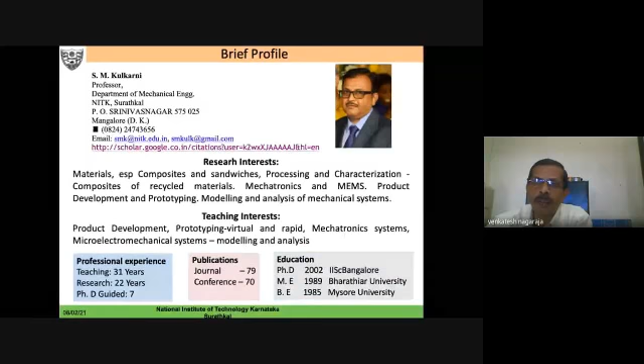We will start. Dear participants, it's my privilege to welcome Dr. S.M. Kulkarni for this session of the FDP. Till now we could listen to Mr. Vinayak Kamath from the industry perspective, on the various benefits of additive manufacturing, where they are used, and the various case studies he explained wonderfully. Now we will be having the session on additive manufacturing technologies by Dr. S.M. Kulkarni, covering various technologies like SLA, DLP, CDLP, SLS. We have been listening to them, and we will know more about those technologies, how they are used, where they are used, and all those things.

Let me introduce Dr. Kulkarni to you all. He is working as a professor at the Department of Mechanical Engineering, NITK Surathkal, and his research interests are in the field of material science, especially composites and sandwiches, processing and characterization, composites of recycled materials, mechatronics, MEMS, and he has extended from composite materials towards product development, prototyping, and modeling and analysis of mechanical systems.

Along with research interests, he has also demonstrated his teaching interest in the field of product development, prototyping, virtual and rapid mechatronic systems, MEMS, modeling as well as analysis. He has a profound experience of 31 years of teaching, out of which 22 years are in dedicated research work. His publications number 73, across 79 different journals and 70 conferences, and he has an H-index of 11 on Google Scholar and 10 on Scopus.

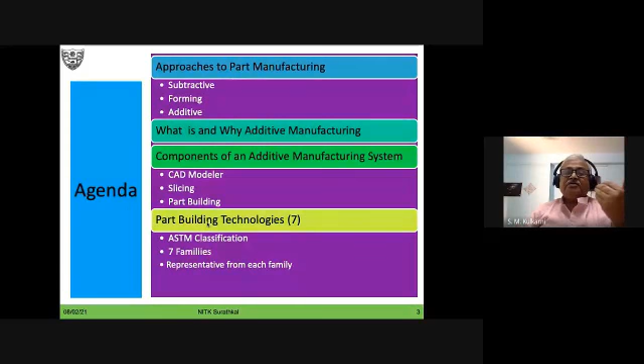Then we will start with the ASTM classification. ASTM has divided all these part building technologies into 7 families, and I will take one representative from each family of part building technique and discuss how it works. Finally, we will conclude with a summary of this talk, and whatever clarifications you need, we will look at those later.

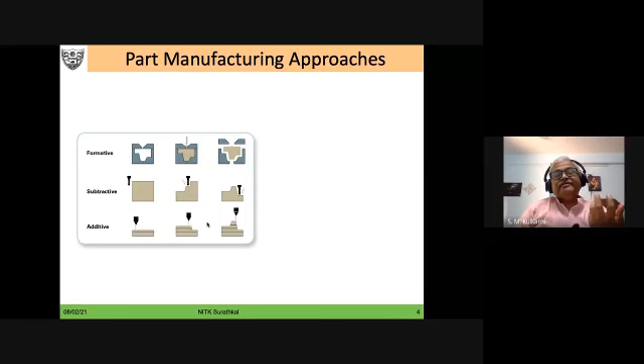There are 3 different part manufacturing approaches. The earliest is formative: make a mold, create a cavity, put a molten material into the cavity and allow it to cool. The molten material, after cooling, takes the shape of the cavity you have created. This is the good old casting technique. The same applies to injection molding, where we inject fluid plastic into a cavity, and when the cavity opens, you have the part cooled in that shape. This is the formative technique, with examples like injection molding, die casting, pressing, and stamping.

The second approach is you start with a bigger block of material and cut the material out wherever you want, depending on what kind of shape you want to create. Based on that, you remove the material. You are taught in basic mechanical engineering a large number of material removal processes like turning, milling, and drilling. All these are examples of material removal, the subtractive approach to part building.

The third approach, which has lately become more popular, is the additive approach. The first principle of additive approach is that the part is created layer by layer. One layer is made and on that another layer is put; those two layers fuse together and gradually the part is built. This is the principle of additive manufacture: layer by layer assembly is the crux of additive manufacturing.

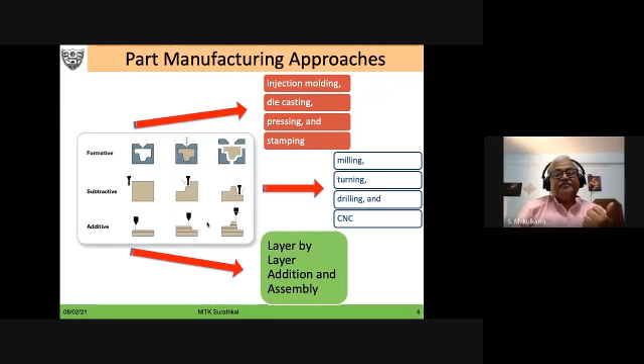So this is the comparison between subtractive manufacturing and additive manufacturing. Dr. Kamath also mentioned that there is a lot of waste in subtractive manufacturing. Though some part of it can be recycled, even the recycling costs a lot.

Say for example, when I start with a basic material like this, using the subtractive approach - drilling, milling or turning - I remove material to get the part I require, generating a lot of waste. But the other way around, additive manufacturing, I use this material and compact it to create the part. So the waste is less when I go for the additive approach.

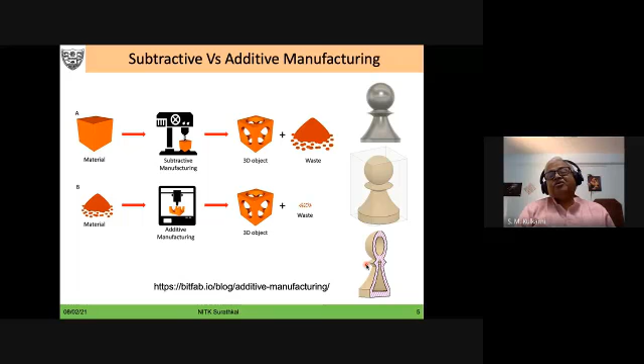The same is depicted here. What I am interested in making is a pawn. The subtractive approach indicates that I should cut the material and shape it like this. But the additive approach makes me think that I can create it layer by layer and achieve the objective of fabricating this part. So this approach reduces cost.

Here are some advantages and disadvantages, and as discussed in the question answer session, it is the economics that is governing. When the number of parts is less, definitely such additive manufacturing will rule the selection.

Forming and subtractive manufacture, to some extent, are economical when producing large numbers. Say injection molding is economical when I make a mold and use it for say 1,000 parts. The cost of the mold gets distributed over 1,000 or 10,000 parts. That is why the cost of the part drastically comes down when using these processes. So ultimately, it is the economics which governs the selection of these processes.

So when the part is big, presently the build rates are less, cost is more, and only when you have different complex designs can you go for additive manufacturing. It is nicely said in point number 2, complexity you get for free - that means any complex shape you can manufacture which otherwise is difficult to manufacture by CNC or injection molding or other types of processes. So this is a quick comparison of these approaches.

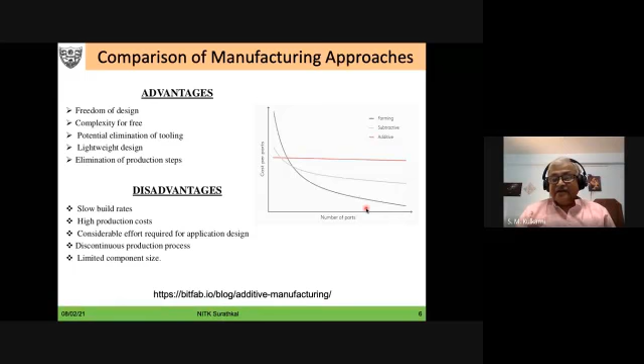So with these advantages, we would like to look into additive manufacturing - what it is and all.

If we go back to history, it all started with photo sculpture. There are 2 epochs accredited to photo sculpture. One is Francois Willeme, who was asked by his king to create a life-size doll of the king within a very short period. The story goes that he hired about 6 sculptors and started with a cylindrical piece, divided into 6 areas, drew the picture of the king on these 6 portions, and asked them to work independently, which finally consolidated into the sculpture. This is called photo sculpture.

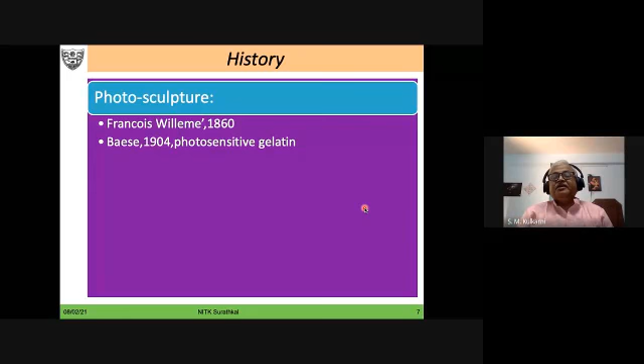Photosensitive gelatin was found in 1904. Gelatin is a material which swells with exposure to moisture. What we did is start with gelatin, cover the required parts with some material, and then expose it to moisture. The gelatin got swollen in those parts, creating the shape of a human being. That was Baese in 1904.

Some more epochs got added, like photo sculpture and topography. Topography is creating a survey map, a 3D survey map of Earth - showing where there is a mountain, where there is a valley. This was all made by cutting curved sheets and stacking them, done by Morioka in 1934. You see some of these models, like power project models or building models, tabletop models - they were created by stacking, cutting, and attaching those sheets to create a structure.

So this was the earliest idea to make a solid object out of small layers. In 1951, the earliest way of curing a photosensitive resin came into existence, and later on we have commercial versions of this stereolithography apparatus, which is one of the earliest part building technologies in rapid prototyping, or as we now call it, additive manufacturing.

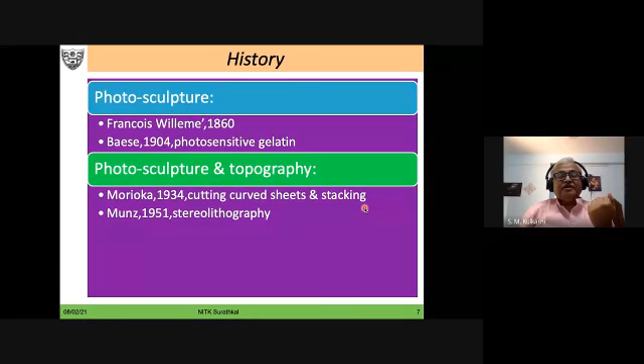There are some other triggering events in the history of additive manufacturing. In 1968, photosensitive polymer was discovered by Swainson, added to UV curing resin, which takes the shape. Then Ciraud gave the idea of compacting a powder with some energy used for fusing these powder particles. So these are some of the noted events in the history of additive manufacturing.

But presently, earlier this additive manufacturing was called by the name rapid prototyping. So now coming to the perspective of why do we require this additive manufacturing for prototyping - quickly, I'll request you to observe the product development process.

Once we imagine a product, first we put down a concept, then we identify the different systems, design the parts, and make those parts assemble as a product, testing the prototype before the design is frozen.

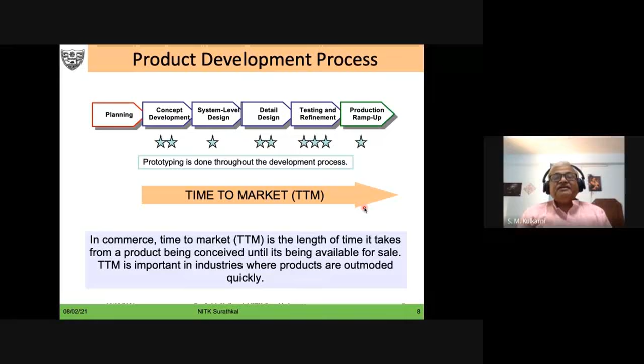But now the TTM for a new car in General Motors, in one of the literature I could read, is hardly 18 months. So today they can conceive a new kind of vehicle within 18 months, all due to different advancements in this product development process. I can represent these advancements pictorially in a graph like this.

The first thing that cut down the time was design modeling, visualization of design. Now there is no alternative to CAD. Everyone knows what CAD is. With the inclusion of computer-aided design, 3D modeling, 3D visualization, and FE analysis, we could cut down the design and analysis time for a new product.

We also added structural analysis - whether the part is strong enough, whether it fails, what forces it can sustain, and what is the optimum shape for these forces coming on the part. All this can be done using finite element analysis, cutting down the analysis part.

Earlier we used to make prototypes and load them - this was called destructive testing. That is now deferred for a later time. So engineering analysis and design optimization was cut down to a minimum by finite element modeling, and you can do lots of iterations within no time.

The third thing that came into product development was rapid physical prototyping, along with virtual prototyping. You also have virtual reality now - you can put your product on a virtual reality platform. People will wear those glasses, go around, and physically feel the product, and then you can freeze the design based on their inputs.

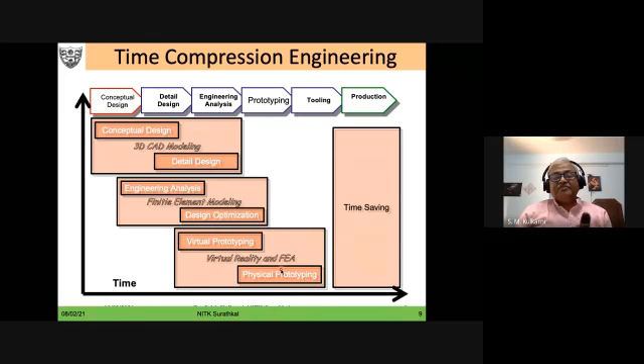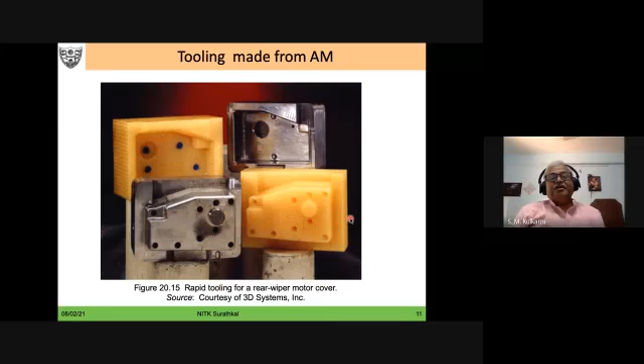Another advantage of rapid manufacturing or additive manufacturing is rapid tooling. You want to create a large number of injection molded components, but for that you require a mold, and to create that mold you require a pattern. Who will give you the pattern? You draw it on the computer 3D modeler, and use RP or AM technique to create a pattern, which you can then use for creating a rapid tool, a quick tool.

There are so many case histories on that - maybe some of them will be discussed in due course in this FDP.

So the basic elements of additive manufacturing are put here. We have to start with a modeler - typically a CAD workstation, a computer, where the 3D model is created. The CAD data is input - dimensions, physical inputs, material - and then the modeler data is passed on to the computer of the part building machine. Earlier they used to be separate, but now we can connect the modeler itself with the part builder.

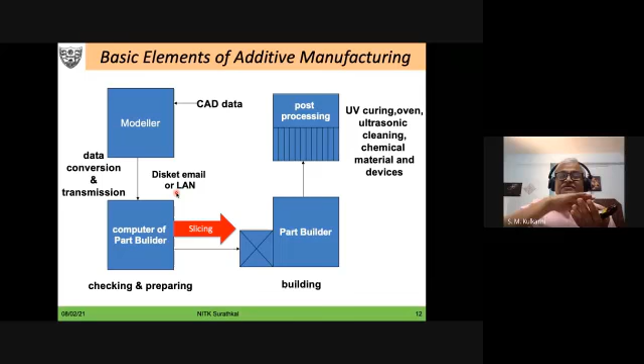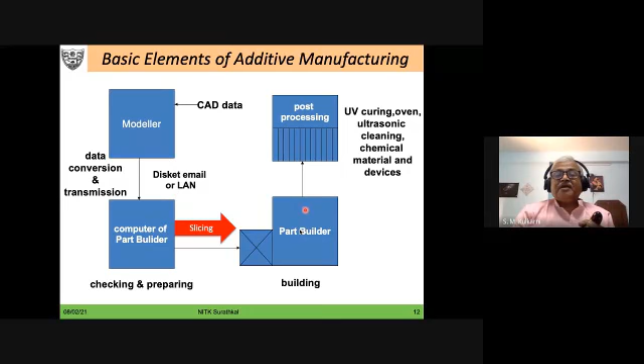That slice data is sent to the part builder, where the part is built layer by layer, and finally some secondary process is done. This is called post processing, where edges that are created can be sanded, or extra features that have come up can be removed, or if there is an overhanging part with support material, it has to be cleaned. All these secondary or post processes can be done.

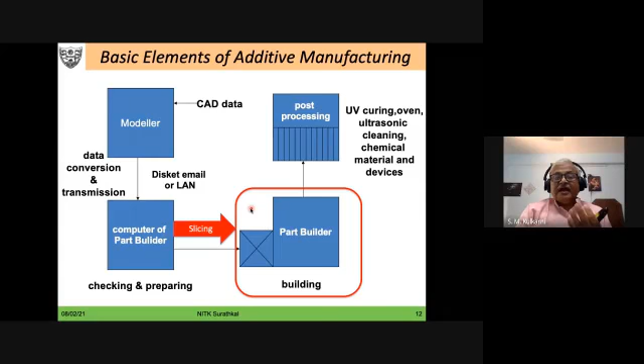So typically my concern now is, one is about slicing. I will talk something about slicing and the part building technology, the 7 family of part building technologies which are used and how they work. That is the total content of my talk.

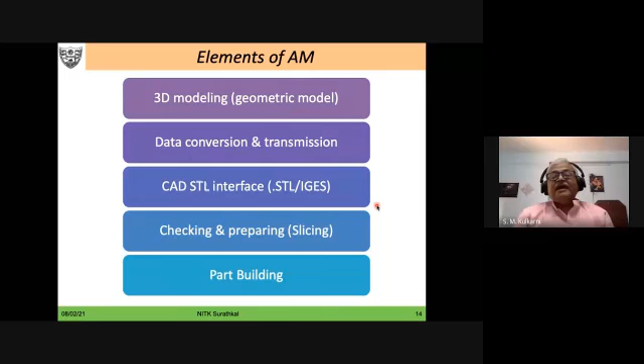The 3D model, data conversion and transmission, CAD STL file, that is for the exchange. The data exchange takes place through either .stl file or IGES file. STL stands for tessellation file. And IGES stands for Initial Graphics Exchange Specification. Using this, it will be transferred to the slicing software, and slicing software creates the slices. Based on the slicing information, the part is built.

Let me just spend a little time on slicing. Parts are fabricated by layers or slices. That is the first thing in additive manufacturing. Geometric information is borrowed from the model. Specialized slicing software are adopted. These softwares are patented by individual companies, and they have their own.

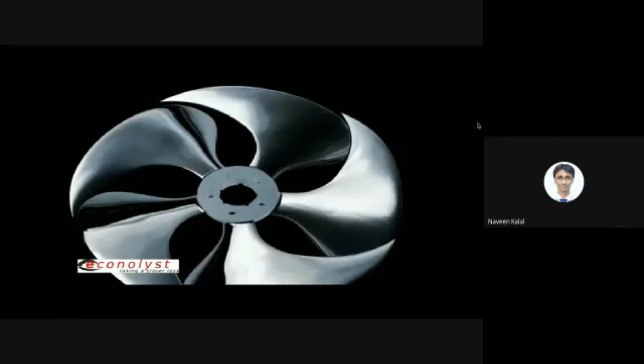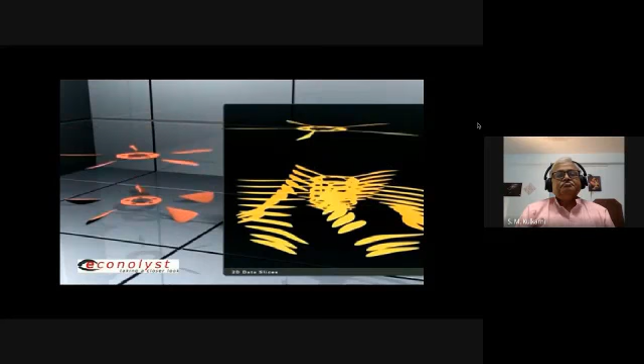Which we call an STL file. STL is now used by all additive manufacturing systems. After inputting the STL file, some additive layer management systems will automatically generate structures that support geometry. The amount of support structure will depend on both geometry of the part and the orientation of the part. In addition to the amount of support structure needed, part orientation will also affect the surface roughness of the part and the time it takes to build that part in the additive layer manufacturing system. Once the part's been orientated and the support structure has been generated, the resulting three-dimensional geometry is then sliced electronically into two-dimensional layers. Each 2D layer represents the profile of the physical layer, which will be made using the additive layer manufacturing system. Once all the layers have been sliced, they then store the slice files on the additive layer manufacturing system waiting to be used. On completion, the slice files are then sent to the additive layer manufacturing system one by one, where they're reconstructed from the bottom up into a solid three-dimensional part. This process is done using laser sintering, selective laser melting, stereolithography, 3D printing, fused deposition modeling, or a whole range of different additive layer manufacturing technologies.

Okay, so that was the slicing. Imagine if this entire blade structure were to be manufactured by a conventional method, imagine how much time it would have taken. Now you can make this kind of structure within a few hours.

So the next part is the physical part building adopted by additive manufacturing. This is the ASTM F2792, which classifies the part building techniques into 7 families. First I'll just talk about the families, and within each family one representative part building technology we will learn in detail. The first is binder jetting. Binder jetting is where you have a powder, and those powder particles can be made into a solid by spraying a binder. The binder liquid will flow amongst the particles and tie them, hold them together. So this is the binder jetting principle. We will learn one technology, one candidate from this family.

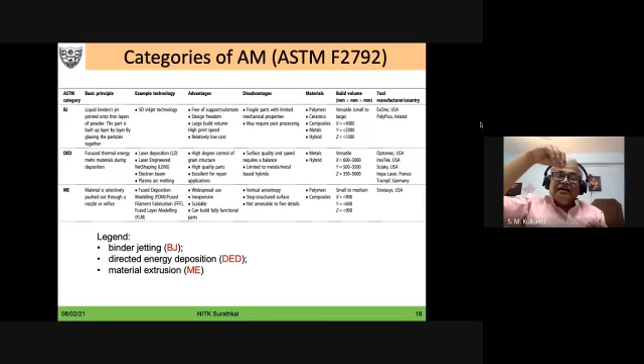Second is directed energy deposition. Molten metal is deposited, high energy is supplied for melting this material, and the molten material is deposited in the required shape to get the part. That is direct energy deposition.

The third one is material extrusion. You create a semi-liquid molten material, spread it on the table, and layer by layer build this molten material to create a part. That is called material extrusion.

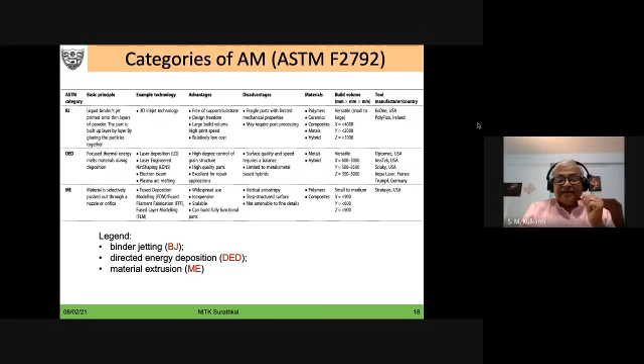As a member of this family, we learn about FDM, fused deposition modeling, from the ME family. I have tried to give the entire, rather features of all these families. Maybe I will give the source where you can get to know more about these families.

Another 4, totally 7 families have been identified by this ASTM standard. The 4th one is MJ, material jetting. The curable resin itself is jetted and made to form the part. And powder bed fusion, where there is a bed of powder on which you have a high energy beam like laser or UV, which will cure that part and make that powder fuse. That is called powder bed fusion.

Then sheet lamination. Imagine you want to build a cone out of stickers. Cut those stickers, stack those stickers one above the other, and you have the part built. So it is sheet stacking of sheets. That is called sheet lamination.

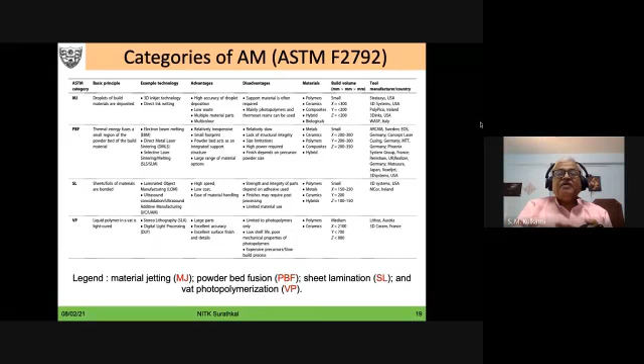And the last one is photopolymerization or vat photopolymerization, which is our stereolithography, where you have a liquid collected in the vat and you expose this liquid to a UV or laser beam, which writes on the liquid surface and the surface hardens. The entire height of the part is created by this repeated photopolymerization through UV or laser exposure. So the candidate in this family is the stereolithography apparatus.

So these 7 families and their features can be visualized here. These are 4 out of 7. VAT polymerization - we will see the stereolithography apparatus. Powder bed fusion - we will see the candidate selective laser sintering. Then binder jetting - we have 3D printing as a candidate.

Material jetting, multi-jet modeling - we will discuss some basic principles of how the system works. Then 3 more: sheet lamination, laminated object manufacturing, LOM, we will see as a candidate of this family. Then material extrusion, fused deposition modeling, FDM, we will see as a candidate. Direct energy deposition, we will see LENS, how it works.

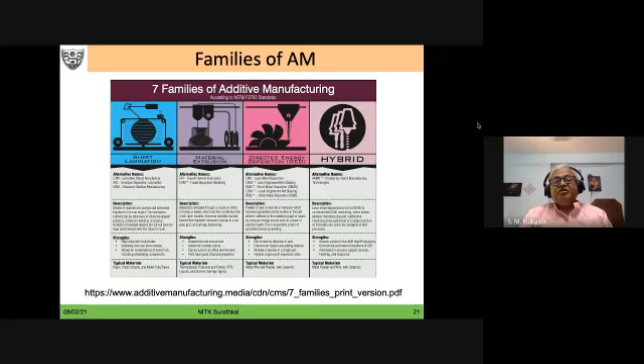LENS stands for laser engineered net shaping. This is a technology belonging to the family of DED. There are other technologies called direct metal deposition, DMD, and LMD - all those are part of this family. So in each of these 7 families, we will see a candidate technology and how it works.

So to start with, this is the representation of 7 technologies and their candidate members. For VAT, we will use stereolithography apparatus. For powder bed fusion, selective laser sintering. For binder jetting, 3D printing. And for material jetting, multi-jet modeling. For sheet lamination, we will use LOM, laminated object manufacturing, and for material extrusion, fused deposition modeling. The last one, DED, direct energy deposition, we will learn about LENS, laser engineered net shaping.

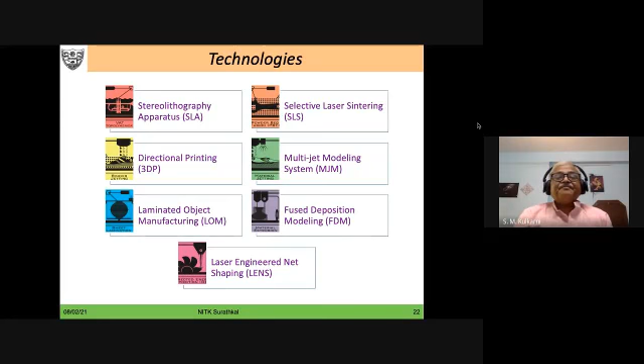So to start with, stereolithography apparatus - how it works. A very simple operation. When the process starts, the table will be on top of, rather exactly at the surface of this liquid polymer resin. This is a vat, a container for a liquid which is light sensitive. Once the light falls on this liquid, it hardens.

In chemistry terms, we call it curing. So when the light falls on it, it hardens, or it cures. So it is photo curing resin. The table will be exactly on the surface. When the process starts, the table dips by a small amount, allowing a layer of liquid about 0.1 to 0.5 mm thick on the table surface.

Then there is a laser beam or UV beam which writes the shape on this table. The beam flips and creates the shape on this thin film of liquid, so that thin film of liquid hardens. Then there is a recoater blade which passes over this and finishes the layer thickness. It trims the layer to the required thickness, and then again the table dips for the next layer.

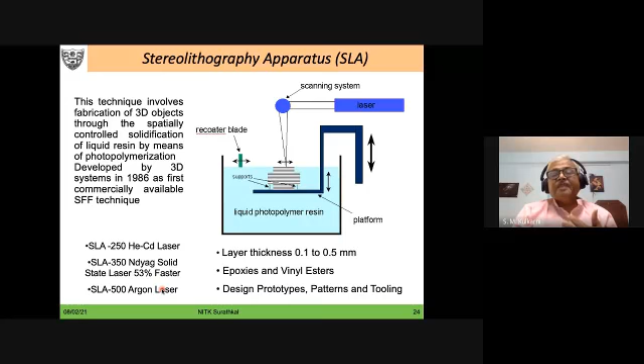This stereolithography apparatus is the earliest among the additive manufacturing techniques. It was easy and used to be done in a closed system. I have some examples of commercial systems, such as SLA 250, using different kinds of beams and lasers. Each manufacturer has its own selection of laser, type of energy, and amount.

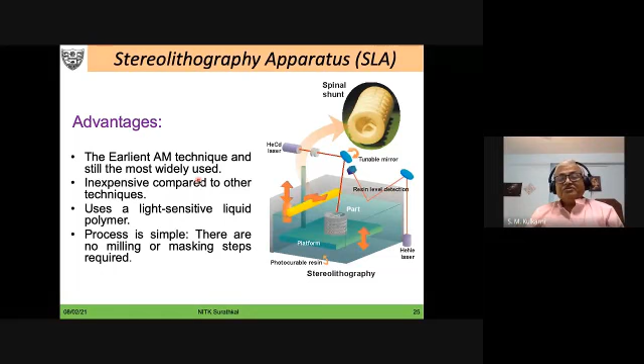This is another explanation, going through the schematic of the process. We have a platform which descends every time to create a layer, a beam which writes the shape, and a recoater blade which trims the thickness. The advantages of stereolithography apparatus are: it is the earliest technique, it is inexpensive, it uses a light sensitive liquid, and is conducted in an enclosed atmosphere. The process is very simple.

I think now I'll play this video showing how it works.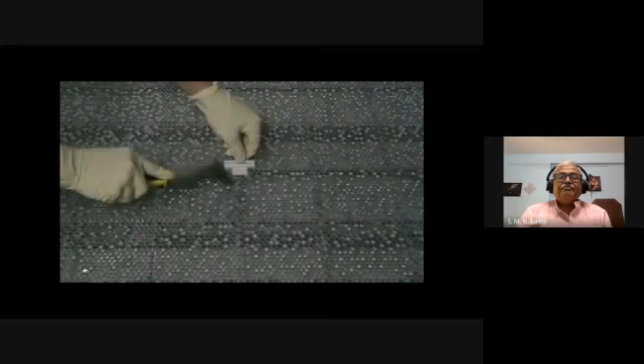Okay, so that is SLA, stereolithography apparatus.

I think this is another video, on prototyping.

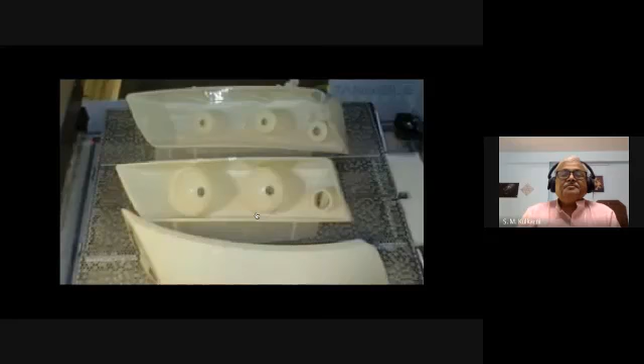Creating a sample part or object before production and manufacturing ensures desired form and function of the final part or design. Modern prototyping can reflect the final design, thereby improving design time by up to 50%. Companies can easily and quickly find out how the part interacts with the environment it was designed for. They can hold it, test it, and feel it to ensure the geometry and design is what they wanted.

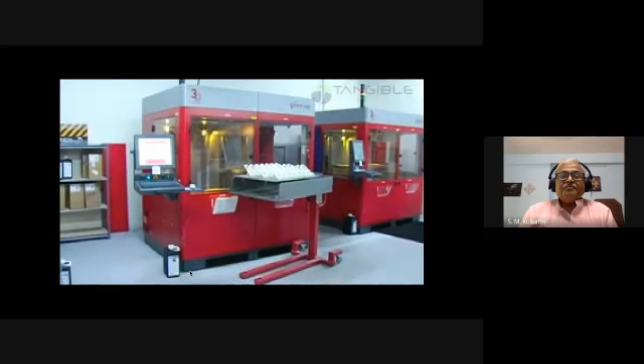One of the main processes for high-end prototyping is called SLA, stereolithography apparatus. An SLA system creates plastic parts by curing ultraviolet sensitive resin with a UV laser. The SLA system consists of a UV laser, a build platform, a vat of photo-curable liquid resin, and a computer system that controls the entire machine.

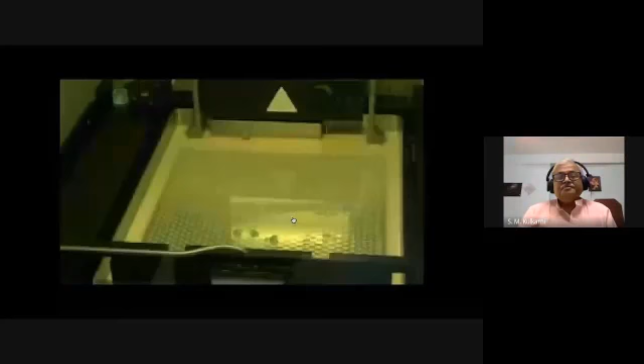All you need to get started is a 3D model of your desired prototype, a CAD software package, or a 3D animation software package. This is all that is necessary to provide build information to the SLA system. Special software then cuts the 3D or CAD file into 1,000 layers per inch, called slices, and outputs the slice data to the SLA system.

First, a platform is lowered into the vat of resin and leveled off at the very top of the vat. The UV laser then draws the first layer shape into the resin, solidifying the first slice onto the platform. After the first slice is cured by the laser, the platform then lowers into the resin anywhere from 1 to 7 thousandths of an inch, depending on the desired resolution.

The recoater arm then sweeps across the top of the previous slice, layering a film of resin that is then cured by the UV laser again. This process repeats as the platform lowers into the vat, and the part is built layer by layer. Within a few hours, the part is complete, containing most or all of the detail from the original 3D file.

Okay, so these are some of the commercial stereolithographic apparatus systems - I have shown here the SLA 7000 system.

So the second candidate is from the powder bed fusion family. It is called selective laser sintering. I will explain the process first, and then to help you understand, I will play a video.

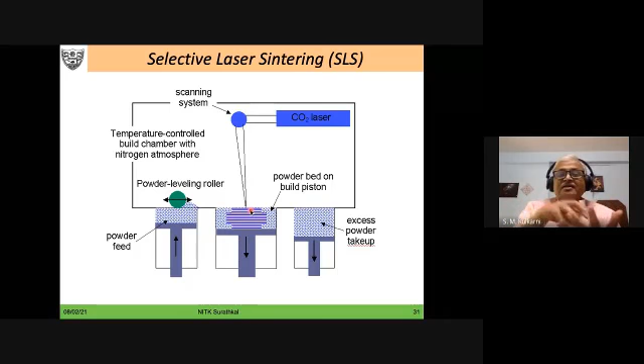So what happens to the powder? Powder particles, because of the high energy laser, melt on the surface and bind together, they fuse together. When they fuse together, that part we assume to be hardened. It looks to be hardened. So that part is hardened.

Again, the table descends down, another powder is fed, and the excessive powder is pushed to this excess powder takeup. When one layer is complete, the excess powder is pushed by the powder leveling roller into this bin, and this can be recycled. It can be reused, so there is no waste, or less waste in the process.

So the powder layer is created by this powder leveling roller, the slice is created by the carbon dioxide laser written on this powder, and the excess powder is put here. So it is a 3-bin process. This entire thing gets repeated n number of times, as many times as the number of layers, to create the entire height or total dimension of the part.

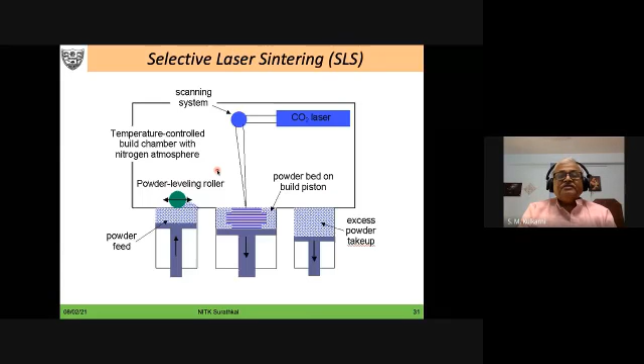So this is selective laser sintering. Here are some of the features. This is a thermoplastic powder, but now metal sintering is also used. Metal powder is used with high energy laser, and they are able to make even metal sintered parts.

CMTI had a direct metal laser sintering machine through which they used to make nice watch casings for Titan Raga, a very famous ladies' watch brand. So very artistic watch casings were made by this direct metal laser sintering process.

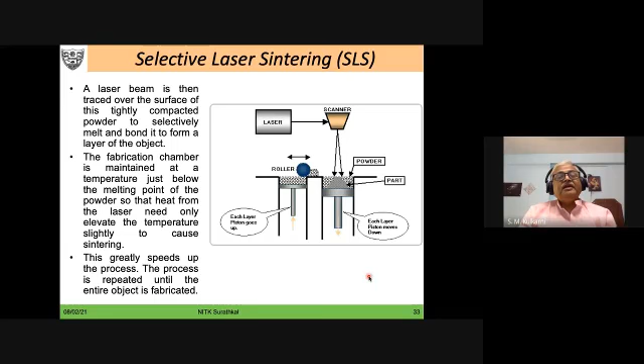So, features of selective laser sintering technology. The process is explained here, quickly you can go through the annotation. A laser beam is traced over the thin layer of powder, and the part building piston descends down to create layer by layer. Selective laser sintering can be used for any commercial things.

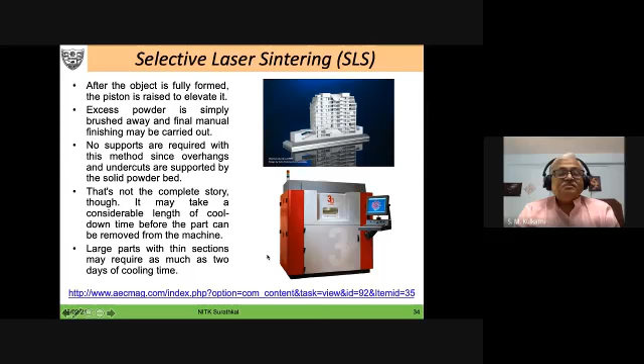Okay, I'm sorry. Yeah, I think I have mixed up the video.

I'll play again. So the next family is 3D printing or binder jetting, BJ. The candidate is binder jetting. In binder jetting, it is not fusing of the powder, but binding of the powder by jetting a liquid ink or liquid binder onto the powder particles.

Excuse me sir, I'm sorry, somebody else is presenting, we are able to see your screen. Muttaya, please stop sharing your screen. I'm not able to hear correctly. Somebody else is sharing their screen, sir. Okay, we'll see. We exited, please continue sir. There was a problem, and it is resolved, you can please continue. Because my video was not available.

Okay, anyhow, so binder jet technology. Here, the powder layer is not fused layer by layer, but it is bound by liquid particles sprayed onto it. So 3D printing, which is of late a popular technology, is the example for this kind of binder jetting family.

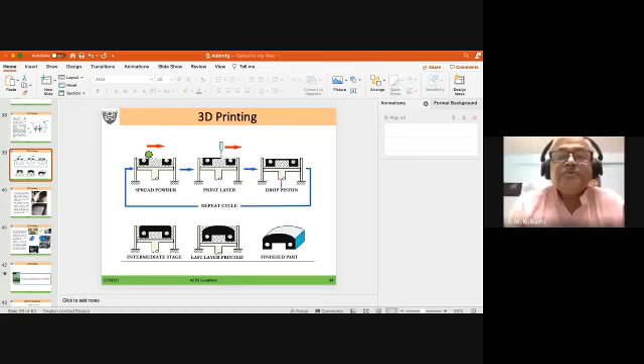The next family is - sir, make it presentation mode, make it presentation mode. Actually, I have made it in my laptop, you are not able to see that. Are the slides advancing? Just do one, sir, I will see. No, sir, it's not going, they are not moving. Okay, there is some problem. I'll go back, stop presenting, and do it again. Now, is it in slideshow mode? Let me check. Yes, sir. Yes, advance this slide, sir.

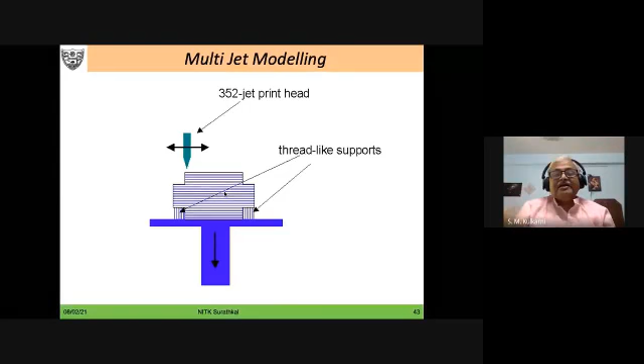So now the multi-jet modeling is a member of the material jetting family where the curable resin is injected through a large number of nozzles and it takes shape, gets cured in the required shape of the layer, and the layers are built. This is the simple concept schematic for explaining: through the nozzle, a curable liquid is jetted and the cured liquid occupies the layer space, and layer by layer the part is built. I'll have a video to show that. You have an MJM head, material multi-jet modeling head, where a large number of nozzles, like our inkjet printer nozzles, spray the UV curable resin or light curable resin onto a platform to create the layers and the entire shape of the part.

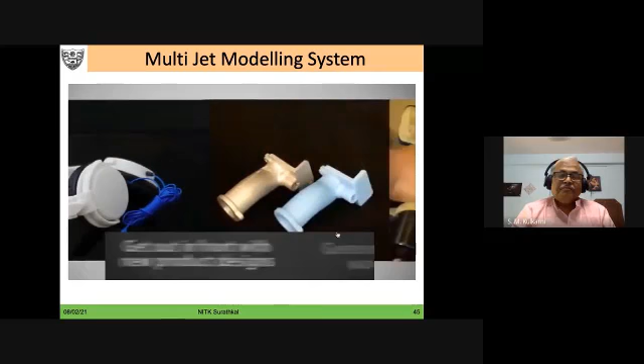So you can see the large number of parts built at one go using this multi-jet modeling.

So the next family is sheet lamination, where the sheets are cut as layers in a particular form and then stuck one above the other to create the part. The example technology is laminated object manufacturing, LOM. Helisys are the manufacturers of this type.

I'll explain the principle and then play the video. Here you have the material supply roll and the take-up roll. The material supply roll introduces the material on top of the work table, and the laser beam cuts the sheet into the required layer form. Once the required layer form is cut, the laminating roller passes over it and presses the layer so that the top layer gets attached to the bottom layer. Then the table descends down gradually to create the height of the part through so many sheets of material from the supply roll.

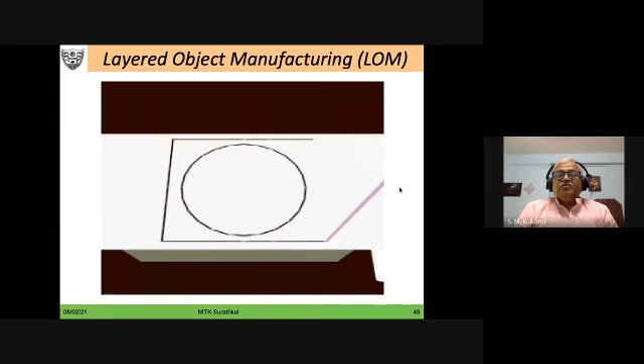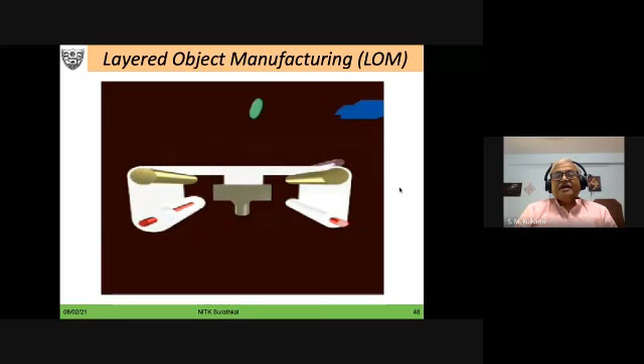There is no audio for this, it is only a schematic that is played. Say one sheet is on the work table, and now it is cut by the laser. Once the layer information is cut, the roller presses this layer; you can observe the table descending and creating layer by layer, and each time the supply roll feeds one more sheet which is cut. This is the technology used for laminated object manufacturing.

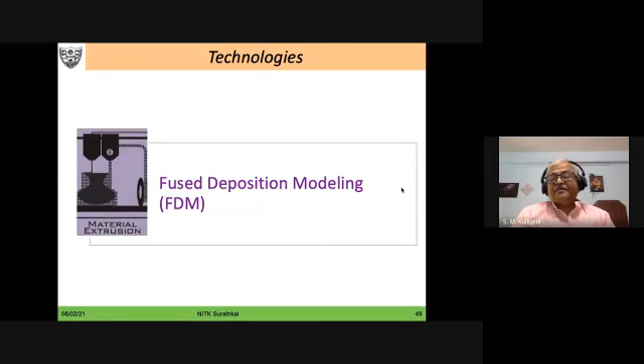The next is fused deposition modeling. After stereolithography apparatus, one of the widely used technologies is FDM, fused deposition modeling. Whatever 3D printers you see in the market now, if you go to Amazon and check, from around 30,000 rupees to a few lakhs, even 30 lakhs, you can get different 3D printers. Some are open source, some give only the structure and the program. Most of them are based on FDM or fused deposition modeling. What is this fused deposition modeling? I'll explain the principle first, then play the video.

In fused deposition modeling, we have a nozzle through which the wire form of raw material is passed. The nozzles are heated, the material fuses in the nozzle, and is deposited onto the table, where it hardens because it is in semi-liquid form due to heat. When it cools down, it hardens and takes the shape of a layer, and layer by layer the part is built. This is one of the cheapest and most widely used additive manufacturing processes.

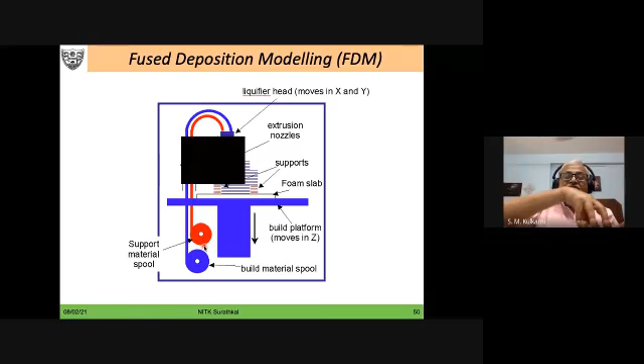Typically there are two types of materials used. One is called support material, used for overhanging parts, where support material is put below and the actual part material is deposited above it. In the post-processing stage, the support materials are removed - they are dissolved using a solution or physically cut using snippers.

So this is the FDM process.

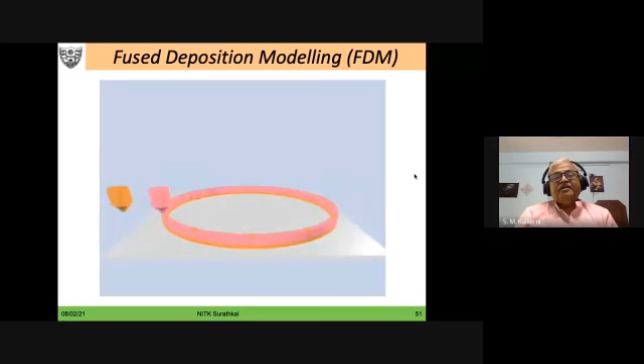You can see the two nozzles - one nozzle is for the part material and another pink nozzle for support material. The part material dispenses fused material onto the table, and then the pink nozzle dispenses fused support material on the table. When the support material is dissolved, you get the required part. The part we are interested in is hollow like this, so we use a large number of support material, which can also be recycled. So there is no significant waste in the process.

Another commercially available FDM system.

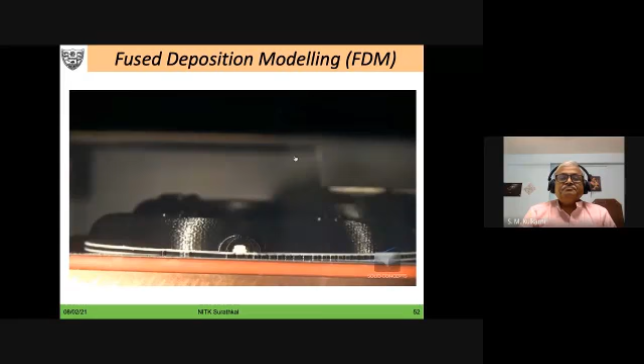So that was the FDM process.

Now coming to the last of the processes - we have only about 10 minutes, so I will try to complete this last candidate, which belongs to the directed energy deposition family, the DED family. It is called laser engineered net shaping. I'll just explain the working principle.

It is an extension of arc welding. Here we have a nozzle which dispenses fused material - it can be metal also - along with a laser beam. So you have the laser beam and a powder stream of either polymer or metal, though it is more popular with metals. Metal powder is dispensed through the same nozzle through which there is a laser beam. When the powder comes in contact with this high energy laser, it melts, and the molten metal is made to create a shape on the substrate.

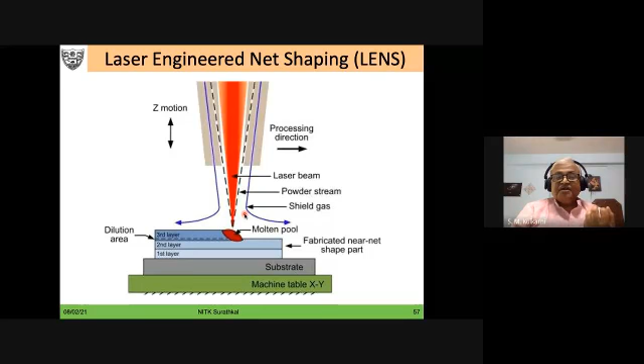So this is laser engineered net shaping, and the exact meaning of this is that it doesn't require any post-processing - what you get is the exact shape and exact dimension. That is why it is called net shaping. You can observe that in the following video.

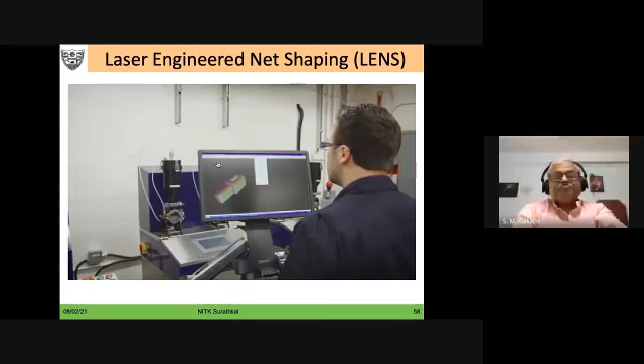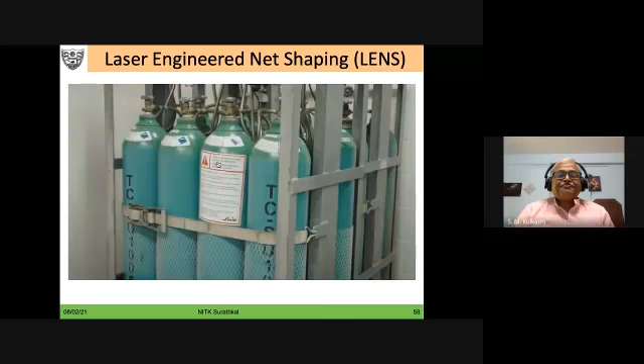Laser engineered net shaping, or LENS, is an additive manufacturing process in the directed energy deposition category. It uses powder sprayed into a laser to produce fully dense parts with a high deposition rate. To begin, a 3D drawing is imported into the device software that divides the part into multiple layers. The powder used is placed in a dispenser, which ensures a constant flow during projection. More than one type of powder can be used at the same time, allowing the production of parts with chemical composition gradients. The chamber of the system is flushed with argon to obtain an atmosphere containing a few ppm of oxygen, making it possible to work with reactive metals such as titanium and zirconium. This technique can also do part repair, production of surface cladding, and adding new sections to an existing part. The part is printed in a few hours, and after a last step of surface machining, the final part is obtained.

Now coming to the last bit of my presentation, we have seen 7 different families as per the ASTM, which has classified 7 different part building technologies. Based on these families, we have seen how these candidates work. More or less, other members of the family also behave like this. We have studied only one typical candidate belonging to each family.

Many other questions for the earlier speaker were also directed at which process is good, which is cheap, which one we have to buy, which one we have to use - all those things. Again, it is a complicated selection process. The selection of the AM process is based on what your purpose is.

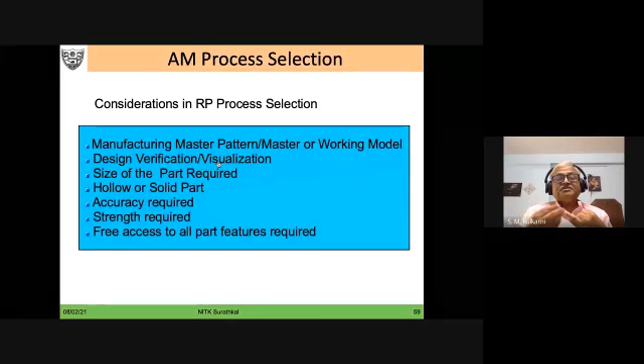Are you using it for prototyping or for manufacturing of the part? Is it for design verification or visualization? What is the size of the part? Is the part hollow or solid? What accuracy of dimension do you require? What strength of the part do you require? Do the part features have free access? Is it complex or simple?

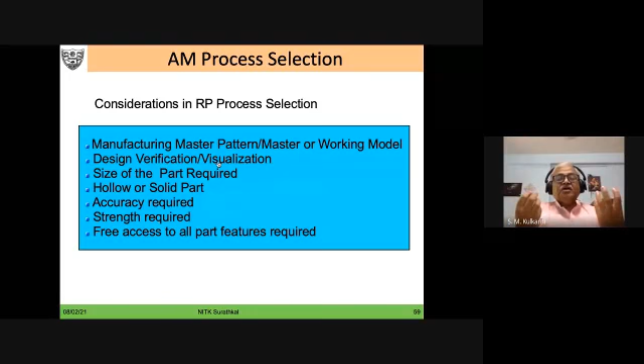All these things matter in your process selection. And ultimately, above all these things, it is economy which rules the selection - whether the part made by additive manufacturing is economical, or the part made by conventional process is economical. If you go for a simple part just because the AM machine is available, and I use it unnecessarily, I am adding cost, when the same part could have been done by milling or other conventional processes. So the selection is very, very critical.

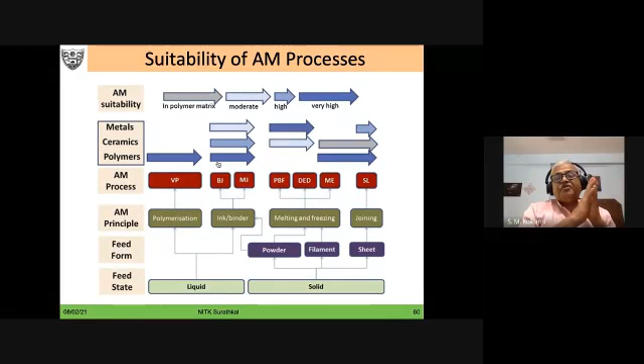Some of these processes are typically for polymers, plastics. The example of 3D Systems, Stratasys, fused deposition modeling - they are even able to create parts of ABS, acrylonitrile butadiene styrene, which is a tough plastic used in many day-to-day applications. So they have a variety of capabilities.

Some processes are for plastics, some are for metals, and metal additive manufacturing is still the costlier version. Metal involves a lot of energy to be imparted to the fusing or deposition, so it is a rather capital intensive system for employing in the industry. So this is the summary.

So with this I will conclude. We started with approaches to part manufacture - subtractive, formative and additive. We dwelt upon the advantages of additive manufacturing. Then we saw the components, what slicing is, and how layer by layer manufacturing forms the heart of additive manufacturing. We learned something about slicing, then part building, the 7 families listed by ASTM, and how each of these 7 families work.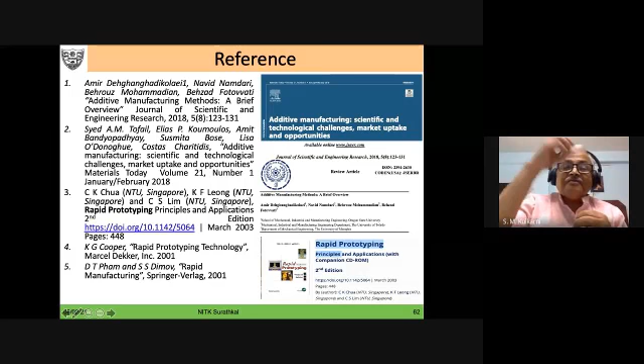The answer was very nicely put by Dr. Kamath that we have carbon fibers now - carbon fibers will give strength. Yes, carbon reinforced composites can give structural strength, but our processes are yet to mature to include those fibers in the FDM, fused deposition modeling process. And build volumes - structural components are large ones and the build volumes required are very large, so that is again a challenge for AM to include.

So each AM process has its own different capability. That is why the selection is mind-boggling. Correct sir, yeah, I could understand it now.

And one more thing I wonder is that with respect to density, normally in conventional CI, whether it takes iron, MS or AL, the density ranges from 3 grams per cc to 8 grams per cc. But plastics are just about 1.2. Then how do they take care of the density factor?

Okay, very nice question. You see, density and porosity are related - density is less when some porosity is induced in the part. Here we are adding powder or adding something and fusing, so automatically the porosity creeps in. That is why in parts made by AM you find that there is porosity. Porosity is there even in metallurgical, powder metallurgical parts, PM.